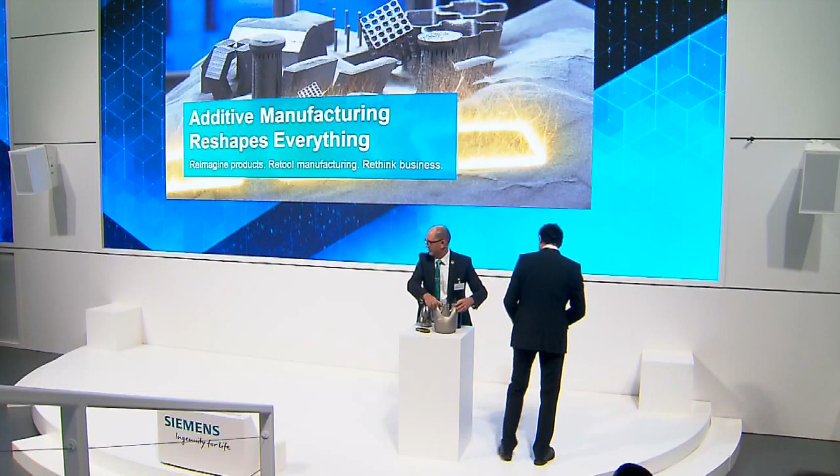At Siemens, we believe in creating new ways to design and to produce better products. And the way we do this is we combine digitalization and additive manufacturing so that we can take ideas in our heads, turn them into digital models that we then have the freedom and the flexibility to manipulate the way we need to, optimize them till they're just perfect, and then turn them into atoms.

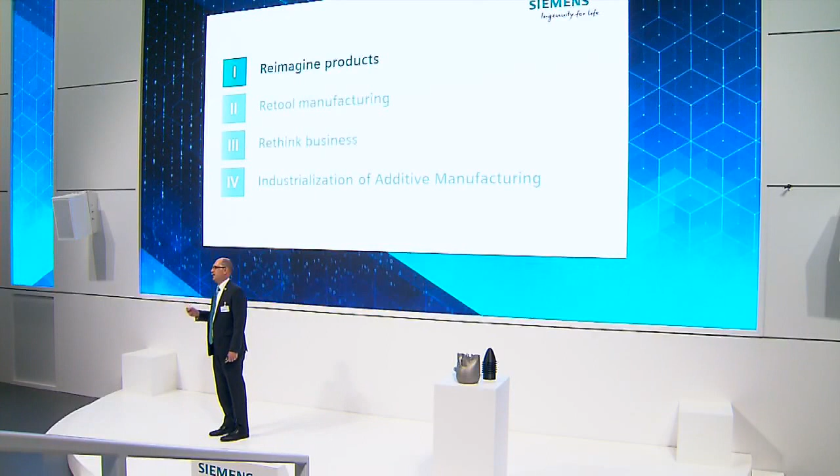But in order to take advantage of this technology, we believe that designers and engineers and manufacturers, we all need to think differently. We need to reconsider how we design in order to unlock the power of this new technology.

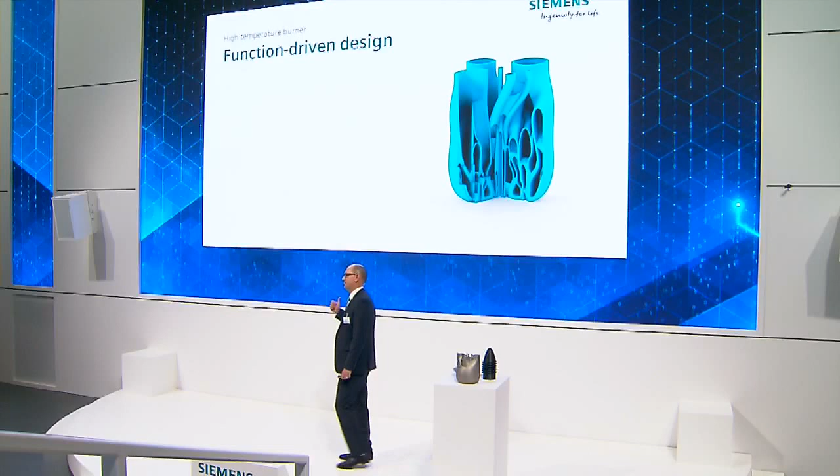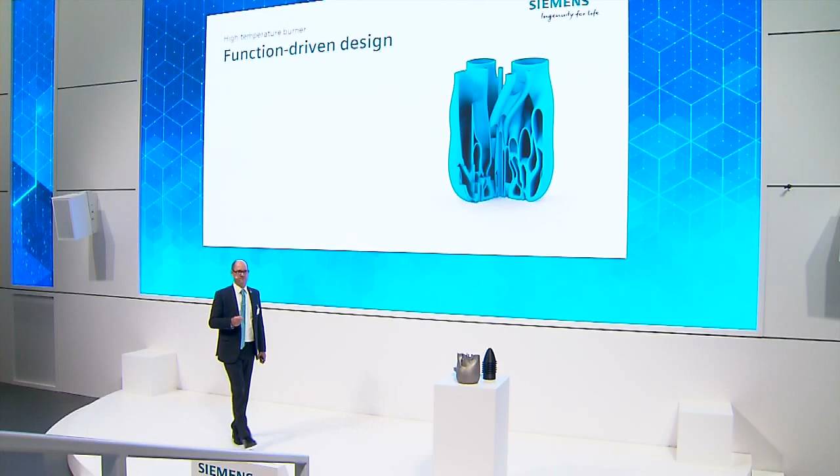When you think differently, you can achieve designs that look like this. This is a significant product. This is something that can be used in fuel refinement. It's a high temperature burner. And what it does is it burns messy fuels left over from the refinement process at extremely high temperatures to be able to extract the hydrogen. The temperatures are so hot that they're hotter than the melting point of the metal of this part.

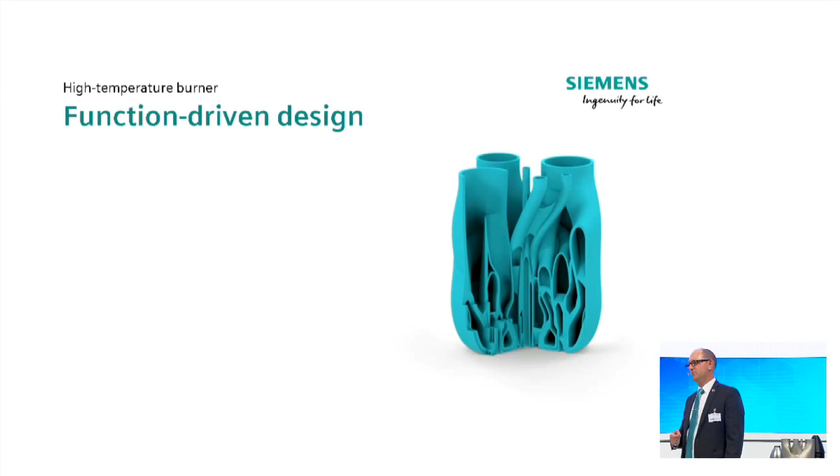The way that you keep it cool is to change the way we think about design and design for function. And we're able to use modeling tools, CFD, computer-aided engineering tools, as well as design space exploration tools to be able to optimize the performance of this system so we can run coolant through this product and keep it cool while we burn the fuel.

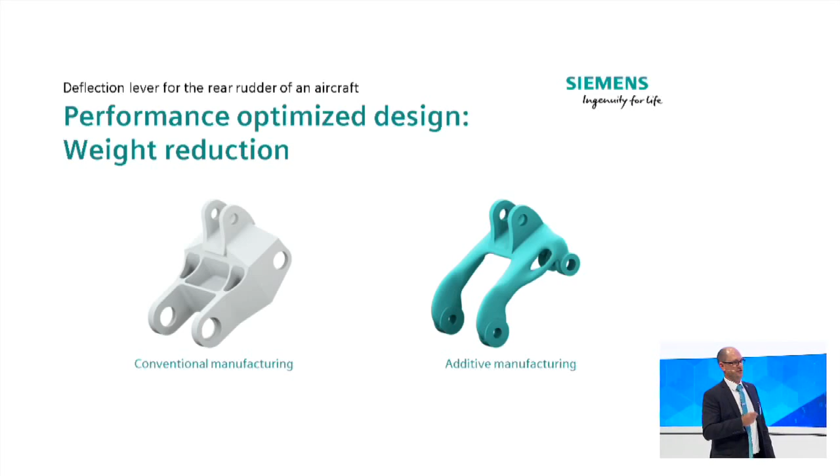And what we've done here is we've used generative design tools, tools that allow designers to input the design goals of a problem and then let the software calculate the shape. And the software generated a shape that performs the same job as the original design. It's just as strong, but it happens to be 15% lighter.

But it's difficult to be able to make this shape using conventional manufacturing. Additive manufacturing is the technology that will enable these shapes to come to life.

Another way we have to change the way we think about design is designing for mass customization or individualization or personalization, like this example here. This is a surgical cutting guide. It's used in joint replacement therapies in hospitals today.

And what's significant about this is we've been able to create a digital twin of a person's anatomy, in this case, the knee, and we use that digital model to give us the inner shape of the cutting guide so that it perfectly matches the patient during the operation. This cutting guide's job is to help the surgeon keep the cutting instrument in the proper location. It removes risk and increases consistency of the operation.

Just some examples of the power of additive manufacturing when we change our design and start to think differently of what's possible.

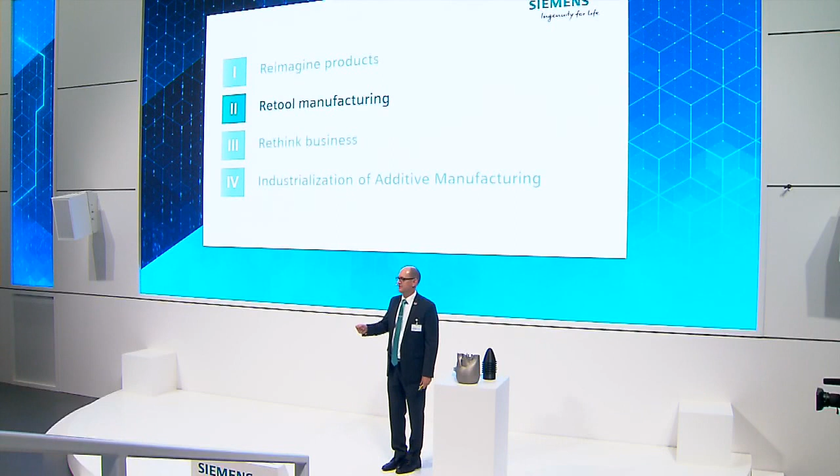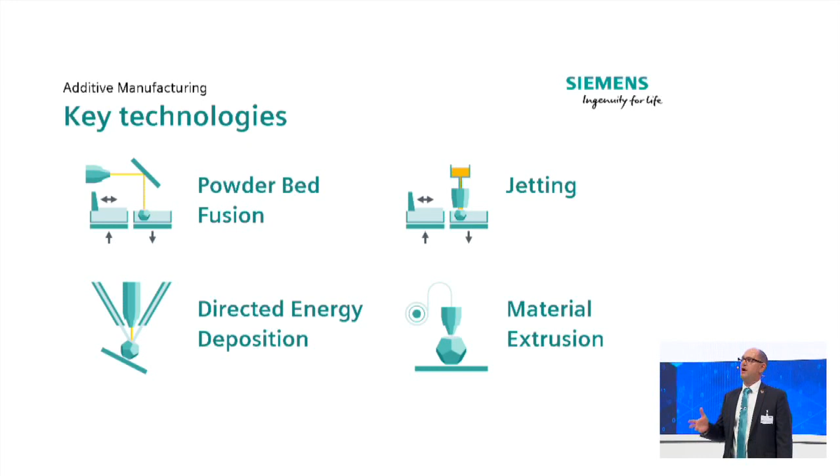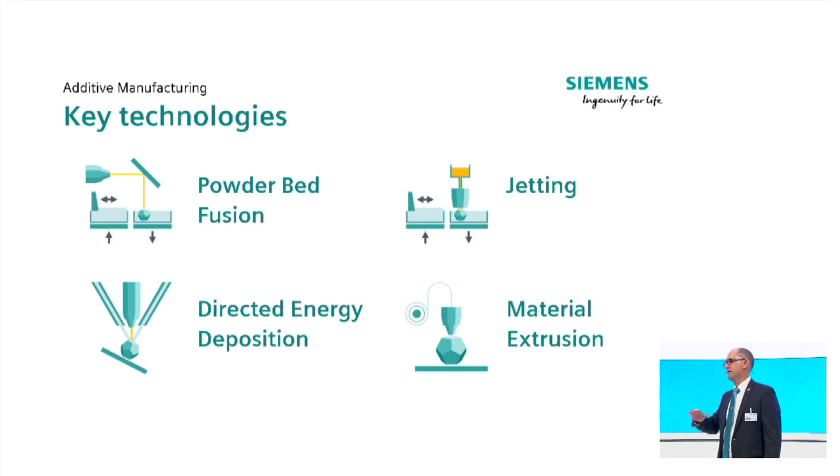Powder bed fusion is a technology that uses a very fine laser and very fine powder. The powder can be metal, ceramic, plastic, polymers, and we basically melt the metal layer by layer as we grow the part. We have very fine control over this laser, and that control enables us to make the shapes that you see on the interior of that burner. This is that gas burner tip that I mentioned earlier, that heat exchanger. Notice the interior shapes. You would never be able to produce this using conventional manufacturing processes.

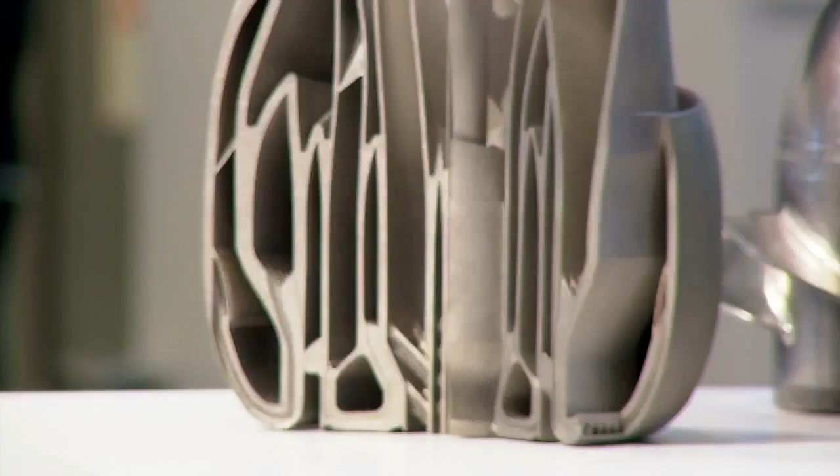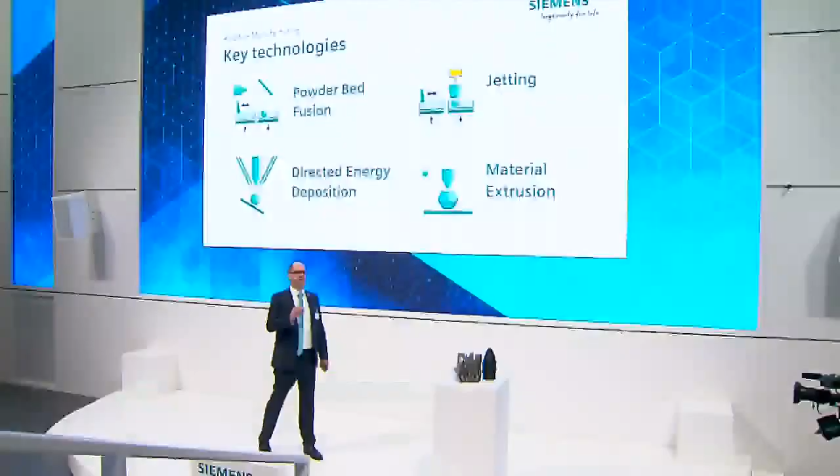Pretty powerful. Another technology is jetting. In order to unleash the power of additive manufacturing, we need to be able to produce parts economically and at large volumes. Hewlett-Packard is pioneering technology for jetting with the new printer that they recently announced last year. And we're working very closely with HP to unlock its power. This gear was printed using the HP printer, one of the first versions.

If you talk to HP, they'll tell you that with that printer, you can produce 55,000 of these parts as cost effectively as you could use injection molding. So now we're able to produce large volumes of parts to begin to replace traditional tooling, which has long lead times and can be quite expensive.

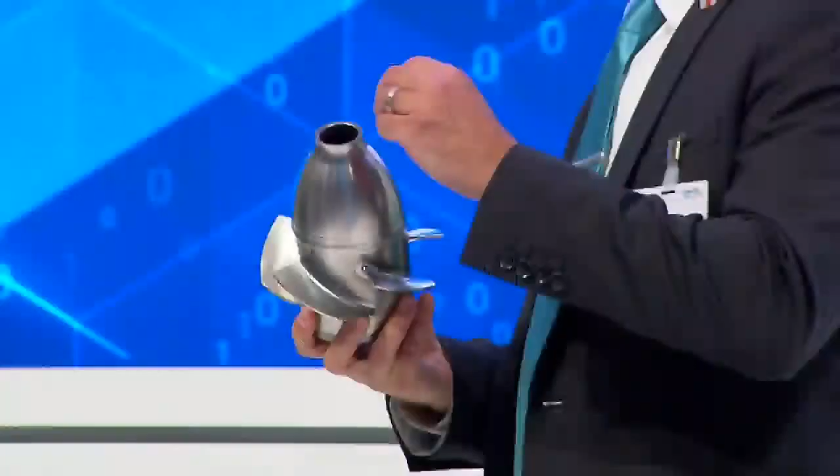Another technology is directed energy deposition. What it allows us to do is take a powder nozzle that blows metal powder in a direction and then hits the powder with a laser beam. We can control that powder nozzle in 5 axes, and we can actually put that on a machine tool that also has CNC machining.

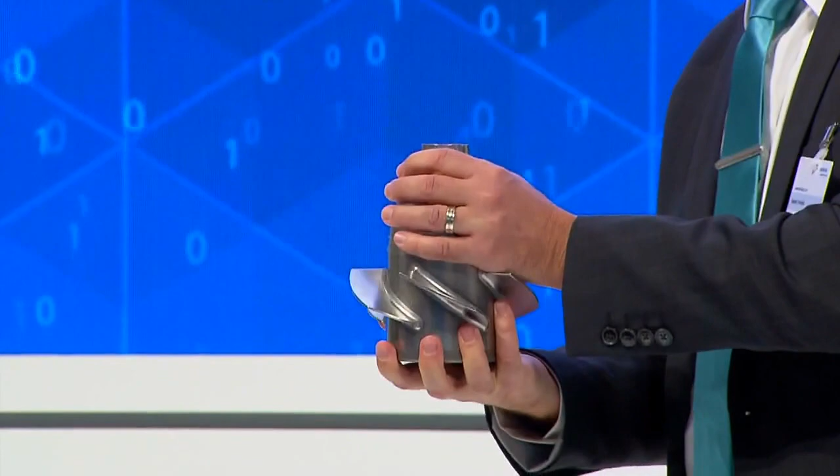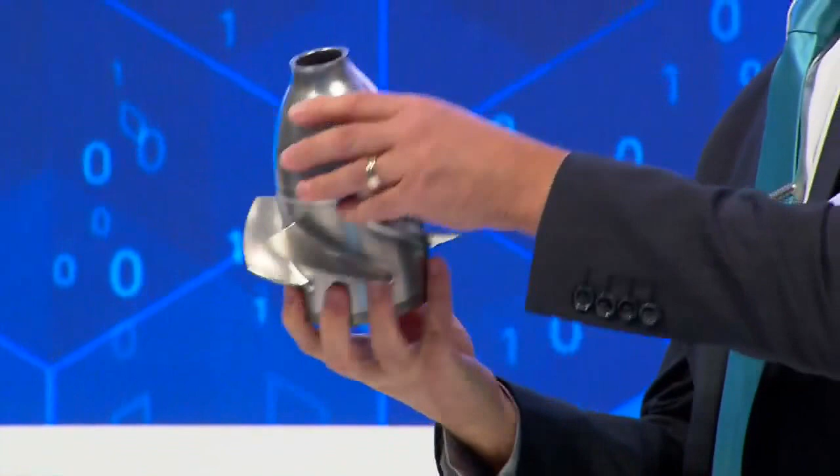This is something that DMG Mori has pioneered, and we've worked very closely with them to help drive these types of tools. What that enables us to do is create very complicated shapes in multi-axes, but then also bring in a CNC cutting tool and finely machine this geometry to the precise shape and surface finish we're looking for. We don't have to take this part off to another machine in order to do those operations. We can do them all together on one machine.

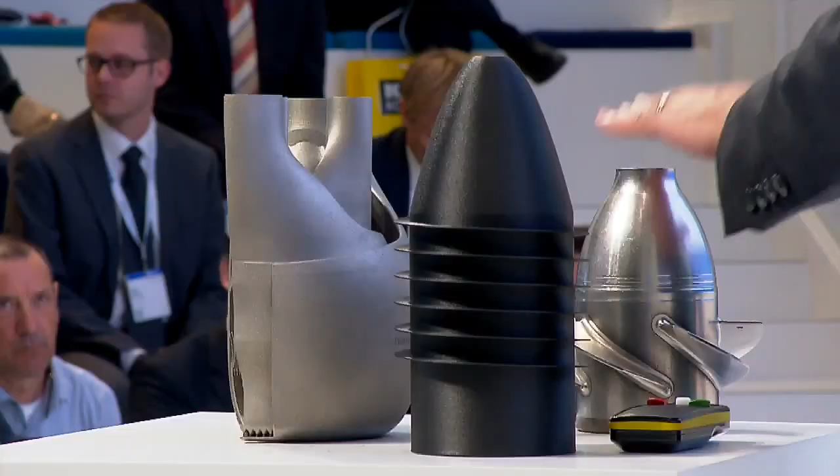You can see an application of this in marine, in aerospace, and in energy. I think another interesting element of this technology is we can also begin to fuse multiple materials together in the same part, which unlocks a whole new capability.

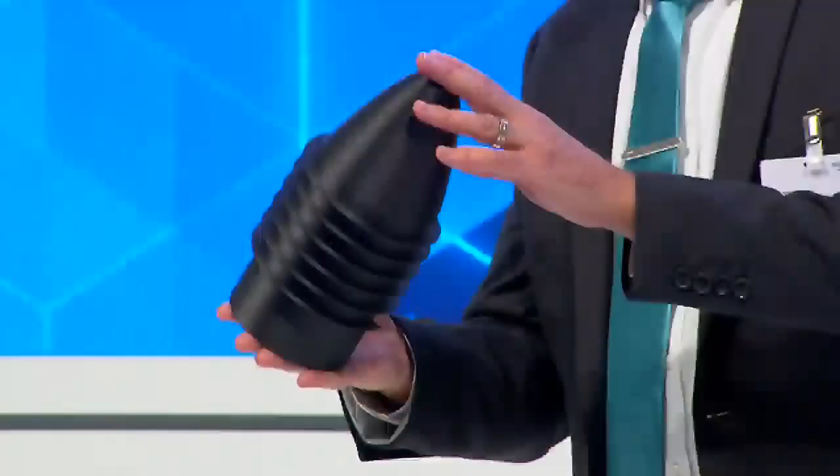And then lastly, another example is this part. This is a material extrusion example, something that we've worked very closely with Stratasys on. Stratasys has equipped a robot, a multi-axis robot, with an extrusion head that can extrude carbon-reinforced nylon. It's a composite. That robot's controlled with a Siemens Sinumerik controller, and it's programmed using our software.

What's significant about it is now we're able to automate the production of composites. We can get the repeatability and the quality that we're looking to achieve. Composites are important because they allow us to replace maybe metal parts that are much lighter. Interesting applications in aerospace, for example.

When you combine this new way of thinking for design and these new technologies for production, we can unlock new business models, new ways of doing business. We can begin to think about printing on demand in the location where we need our parts. This is significant because now we can start to eliminate physical inventory and replace it with digital inventory, removing the complexities of logistics, for example.

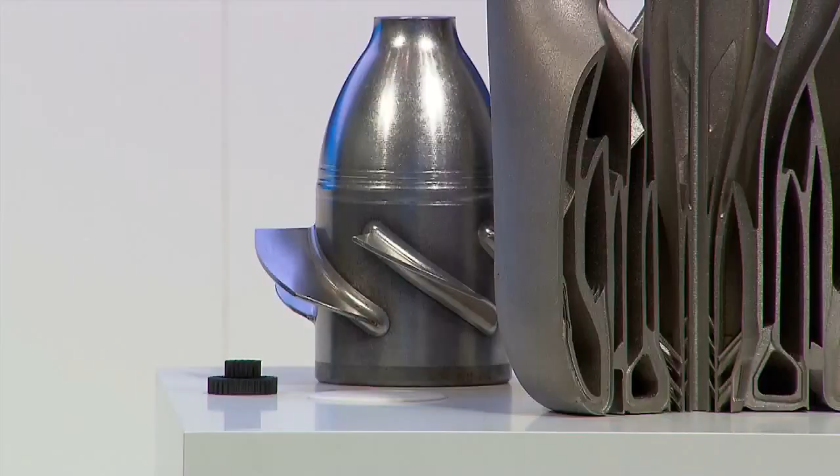We can design specifically for our target consumer using individualization and personalization capabilities, as well as shrink the innovation cycle. If we no longer need to rely on tooling during the prototype process, or castings for prototyping, we eliminate the long lead times, and we're able to iterate and test on real physical parts much faster than we could have ever imagined, which is going to help us increase the performance of our products much more quickly. But there's a big problem.

There's a big challenge, and the challenge is a disconnected process chain. Many companies that are pioneering the application of this technology today face a lot of challenges: a disconnected process chain on the software and design side, where we have to use many different applications from different systems, as well as a disconnected production environment, where 3D printing is on an island, someplace outside the production environment.

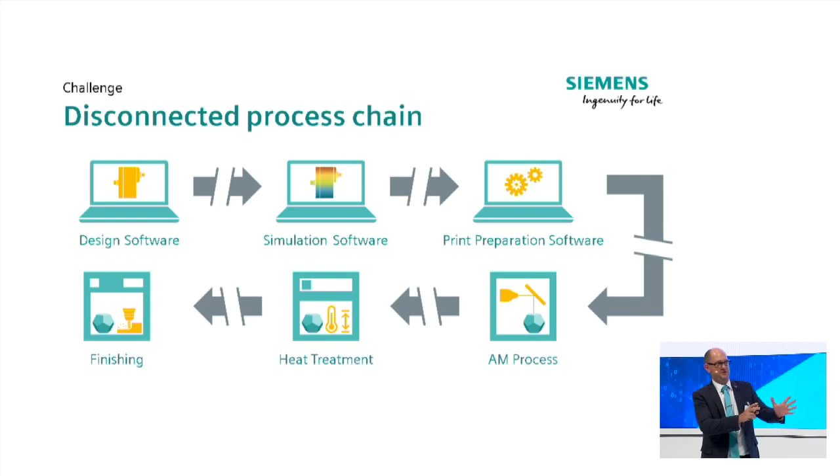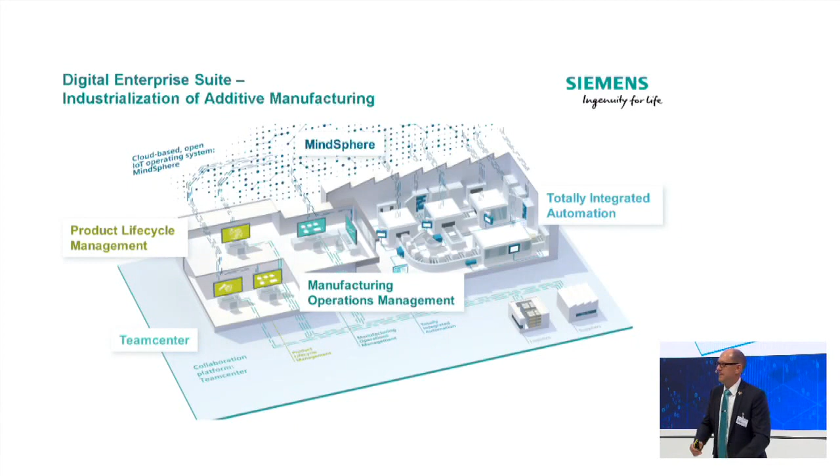So what we're doing at Siemens is we're connecting this entire process. We're adding tools into our digital enterprise suite on the software side and on the hardware side to be able to connect together those workflows.

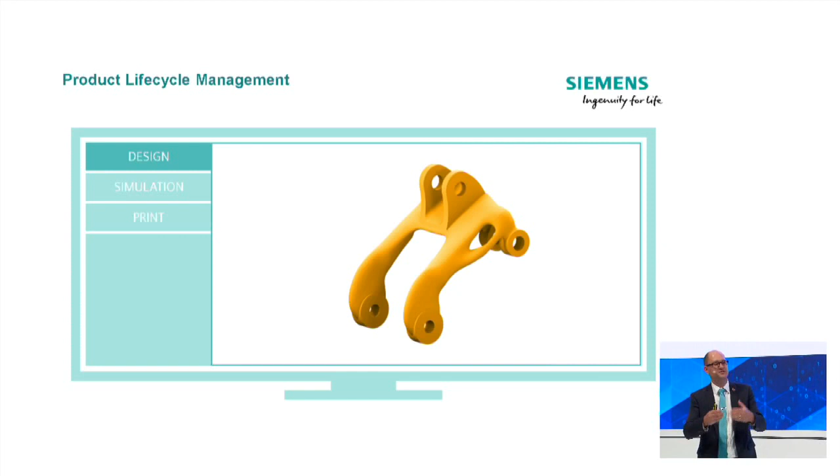In the PLM space, we've added new design capabilities into our system so that now we can create these organic shapes and assist designers in rethinking their products. We have simulation tools that allow us to analyze the performance of our designs as well as how we're going to produce them. We have the ability to prepare our parts and designs to be printed on these different technologies.

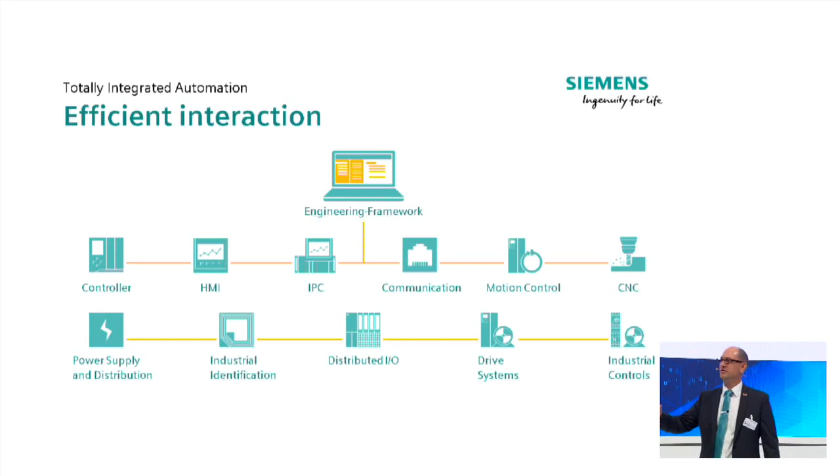In the area of totally integrated automation, we have technology, automation tools that we can load into the cabinets of these machines so that we know we can use these machines anywhere on the planet and they will perform consistently. We have the ability to digitally connect these machines into our networks and production so that we can deliver information and collect information off those machines to help us optimize our designs.

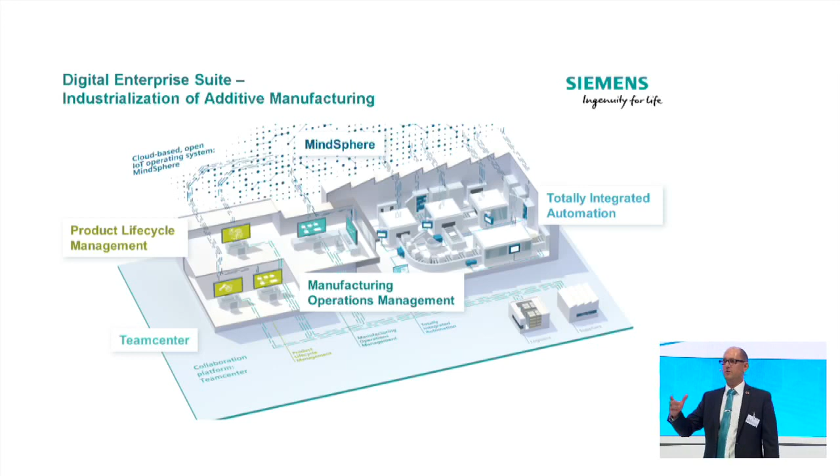We also provide the capabilities to manage all of the manufacturing operations in the production environment so that we can hit our schedules, we know where our orders are, we know what our operators need to do, and we're always delivering the right information when and where we need it.

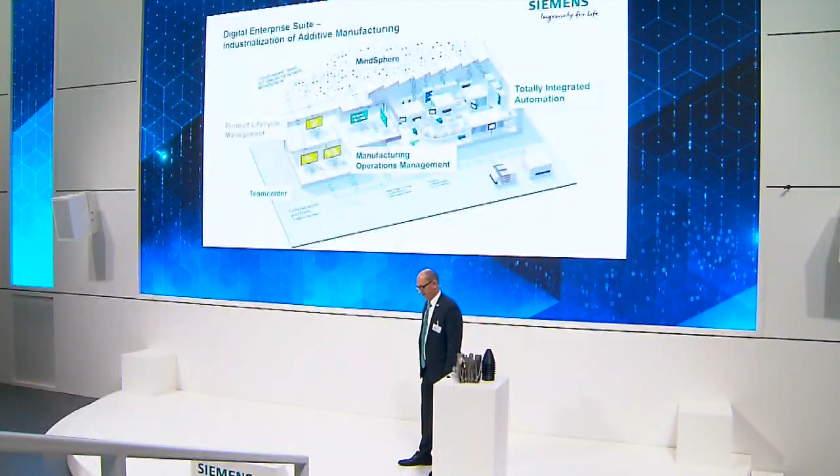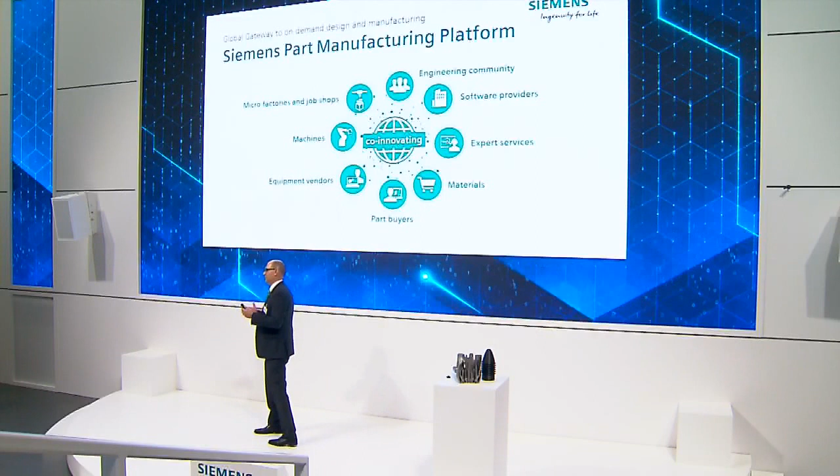And lastly, we recognize there's a lot to learn. In order for us to truly industrialize this technology, we need to be able to tap into the resources available to us in every industry, between designers and manufacturers and institutes and students, young engineers, experienced engineers. So we're building a platform that allows us to co-innovate, where we can collaborate online, share information, co-create designs, and we're adding tools into this environment so that people have greater access to the technology and the information.